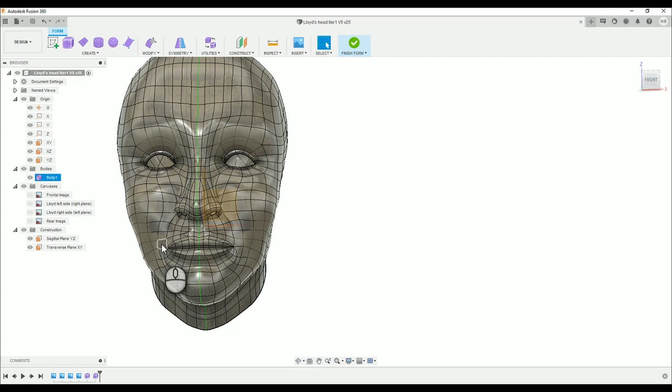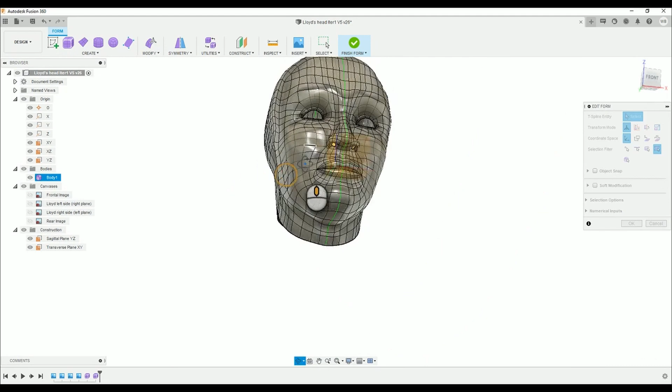Let's begin. In the past, I've always mirrored the features left to right or right to left, so when the model is completed, the face is similar to their real face except it's one side duplicated. I've done this on the 4 head models I've made in my life previous to this one. This time I want to try and create the face without the normal symmetry, so in a moment you'll see me turn off the symmetry.

And FYI, what a massive error.

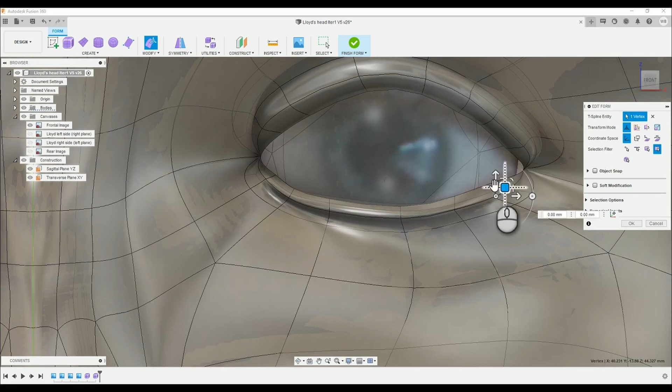I'll explain my motive for doing this as simply as possible. Essentially, I need some level of challenge and learning to take place while I'm working for a project to feel worthwhile. Like I said moments ago, my past head models have been symmetric, and this was done because creating any sort of facial feature felt like an achievement. However, I was always acutely aware of how faces are rarely, if not at all, symmetrical.

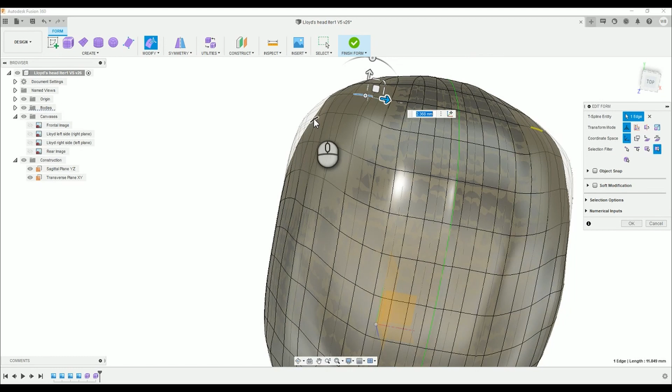So my intention was to turn off the symmetry as early as possible in the process of creating this head. Hence I would be able to capture a better likeness to the model, in theory. Although what I found was that there were still a lot of features that needed to be modelled symmetrically, hence my needless endeavour wasted a considerable amount of time.

And here I am turning off the symmetry using the Clear Symmetry tool.

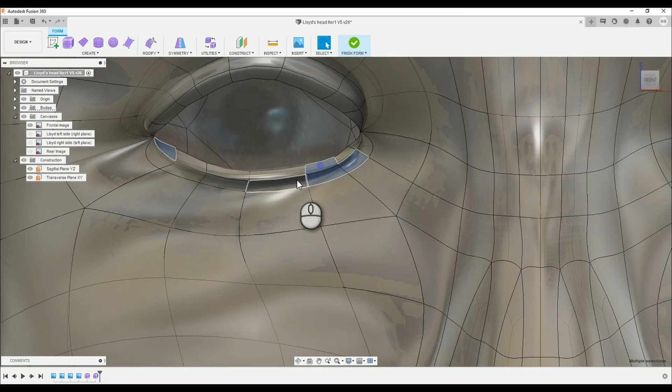It's such an error I made turning off the symmetry this early that I believe I might have reverted to the save point in my design process later on. I can't say with certainty though. In total, during this design process I reverted back to earlier saves twice, so until we reach the 3rd iteration of the design, take my advice with a pinch of salt.

Now, modelling without symmetry, I'm taking care to adjust features all across the face in small incremental amounts, so as to not inordinately disrupt the model at any one time.

As I've previously mentioned in an earlier episode, Fusion has a tendency to mirror your canvas images. In my case, I forgot that it did this, thus I'm modelling the image the wrong way around from a front-on perspective, but because I was smart enough to label the right and left canvas images correctly, it means that flipping the symmetry of the model later on will help. An absolute masterstroke from me.

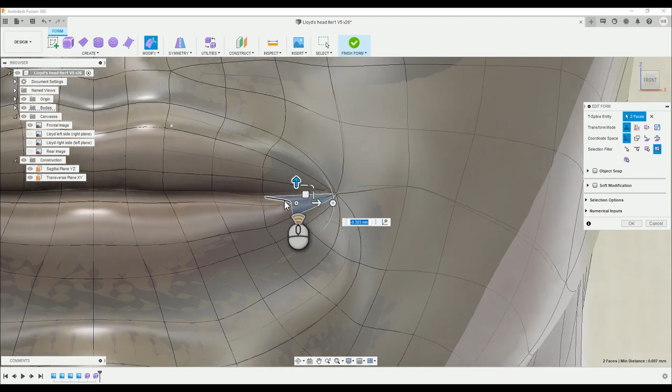In contrast to what I said earlier this episode, turning off the symmetry wasn't an absolute disaster. Certainly for this model it is, but as an opportunity to learn, and I like to think I learn from my mistakes, it's a lesson.

Broadly put, I know now that at least several hours of solid modelling with a fully connected face should take place before the symmetry is switched off, and in this window of time all features should be focused on somewhat, even ones that in the past I've completely underestimated their impact on the model, such as the forehead and the top of the head.

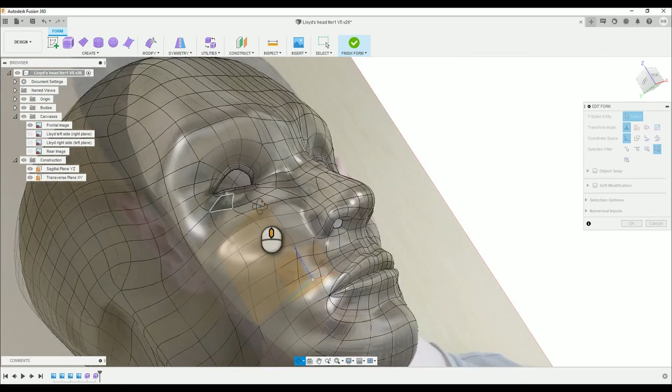When the symmetry is eventually turned off, the list of facial features that will need adjustment is an extensive list. But you'll find that the jawline and the eye placements are the most obvious differences, so set them in the right position before moving on.

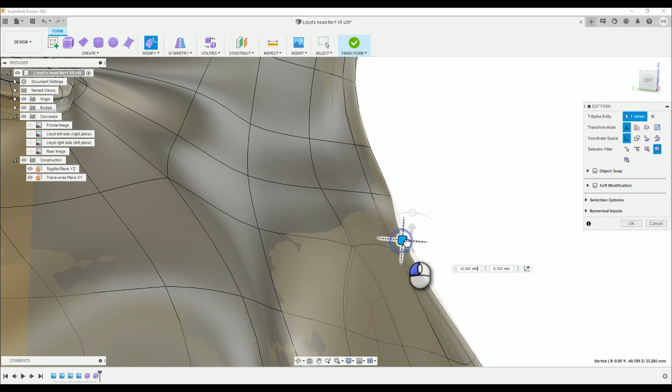The biggest lesson from turning off the symmetry at this point in time is the skill it has given me in modelling, and that isn't something easily put into words. It's like understanding tension. Like if you pulled on a spider's web, you would know how the rest of it would move before you touched it. That's what it feels like.

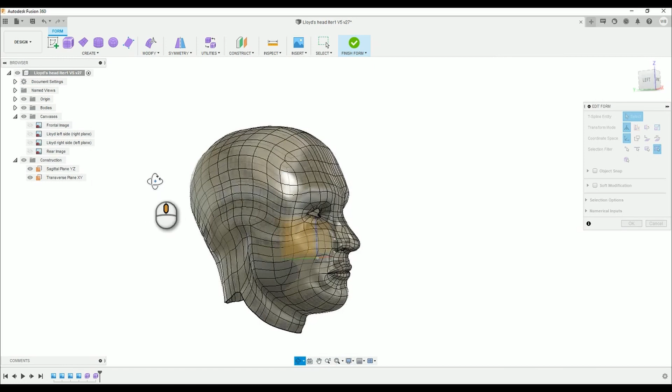It's a feature that when you get it right, it sort of brings the whole face together. That, and an accurate jawline. Do I know how to take the nose in front of me and match it to the man I know? Absolutely not. Do I know the mindset I need to be in to model well? Yes, I think so, probably.

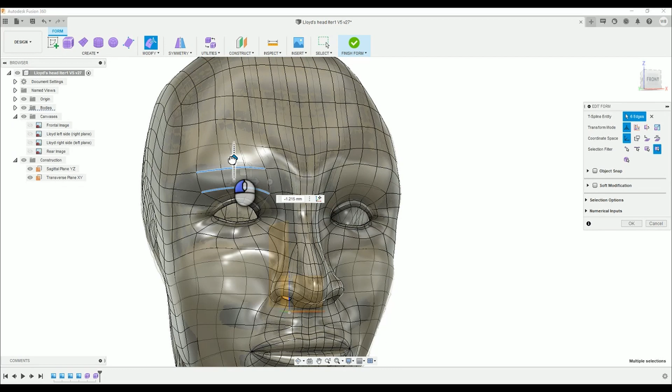You need to be in a tolerant frame of mind. A frame of mind where you can be honest with yourself and your work. A frame of mind where you can destroy hours of work at a moment's notice, because that will happen regularly.

It started out as a frustrating experience for me to delete hours of work. Well, actually, I do save the work, but I don't return to it, so it might as well be deleting. Anyway, it started out as frustrating because I felt like I'd wasted my time.

What you need to realize is that that is the moment you're learning something new, when you realize the changes you've made haven't improved your model. So why carry on and continue modeling the nose on the same path? You'll never get there.

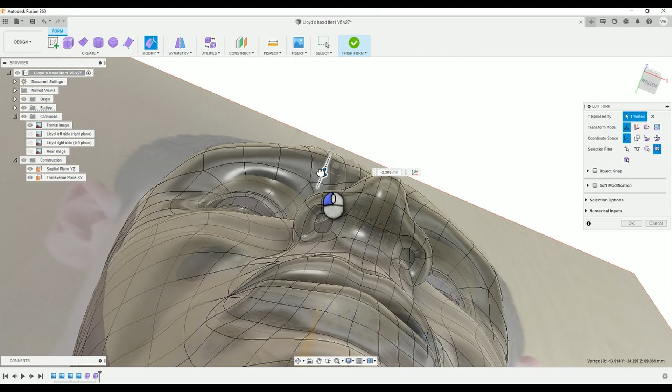Every time you make a change to a feature, such as the nose, and it makes a positive difference to the model, save it and let that be your new starting point. If you continue to model without regular checkpoints, you will fail. It's as simple as that. I can model a nose quite well because I have the patience to model it wrong 10 times.

Notice here, I'm actually grabbing symmetrical patterns. So like I said before, it was a bit redundant turning off the symmetry, because what I'm doing is selecting points on both sides to try and match them up. Like there, I've just moved the left one and then the right section. It's a bit pointless.

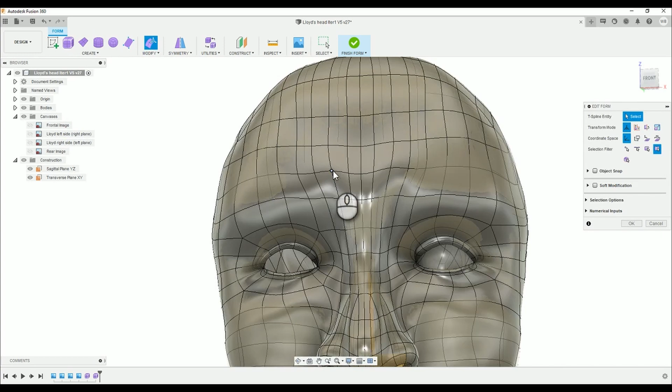But it is looking better. Like I said earlier, the parts that I tend to focus on less are the forehead and the top of the head, and I wish that I focused on them more.

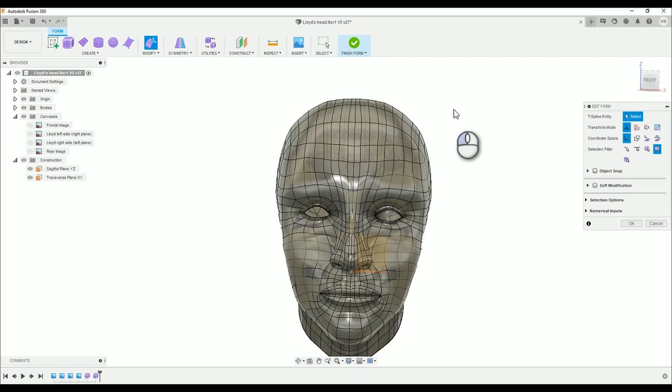Essentially, talking about how the different changes can alter the emotion of the face. So there it looks like he's got something in his mouth or something, as opposed to you might be wanting to make him a little fatter, a little angrier. But if you do it wrong, it can just look like they're eating.

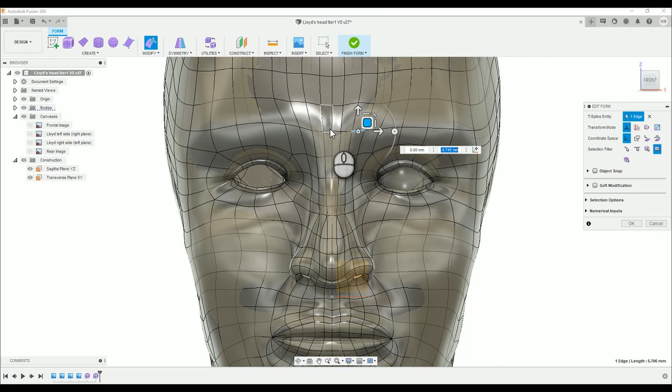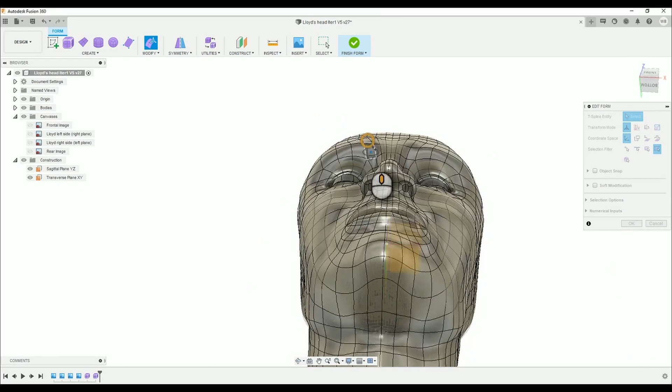But practice as much as you can and have fun. And if you encounter any issues, or wanted a specific explanation of how to do a certain bit - because of course I'm going to cover the ears and the hair - I'm going to continue to post all the footage, so you will still be able to see what I'm doing.

But I'm just saying this is a point where you should look at what I'm doing, try and understand what my goal is in my head, try and understand what I'm trying to achieve, rather than copying move for move, because yours won't match up unless you can move exactly the same amount with your adjustments. Yours will start to differ. You might have been working off a different model from the start.

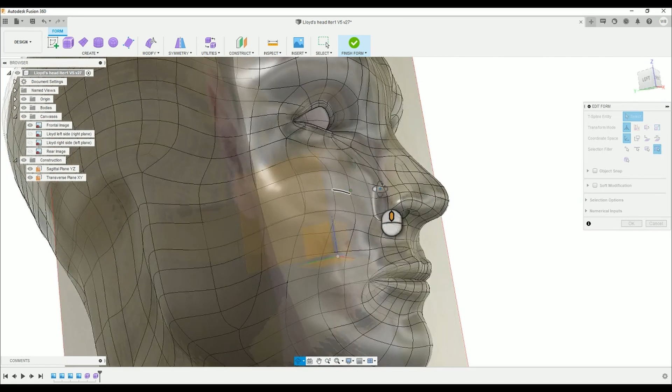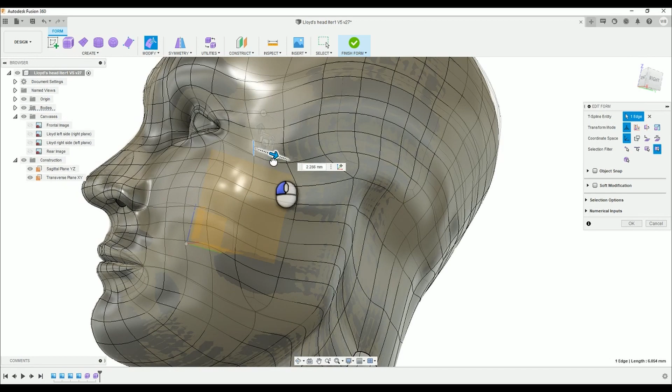But this is the point where you should try and experiment a bit. See how different features might make them look angry or happy, or maybe push the jawline out. I always add the ears on as a separate surface model, but perhaps if you wanted, you could just try modeling the ears into the model. Experiment with that. That's how you improve, really.